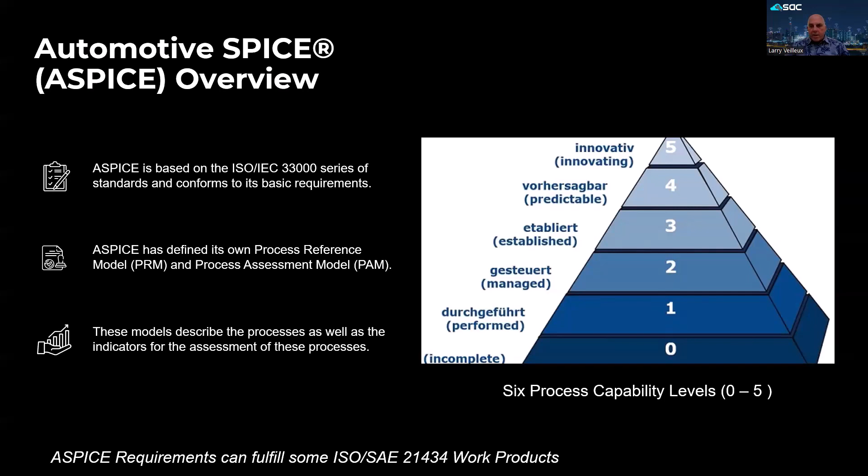ASPICE is based on ISO IEC 33000, a family of international standards developed by ISO that revises the ISO IEC 15504 series of international standards. It provides a framework for the assessment of process quality characteristics, process capability, and organizational maturity. The framework for assessment covers processes employed in the development, maintenance, and use of systems across the information technology domain, and those employed in the design, transition, delivery, and improvement of services. Results of an assessment can be used for improving process performance, benchmarking, or for identifying risks associated with the application of the processes.

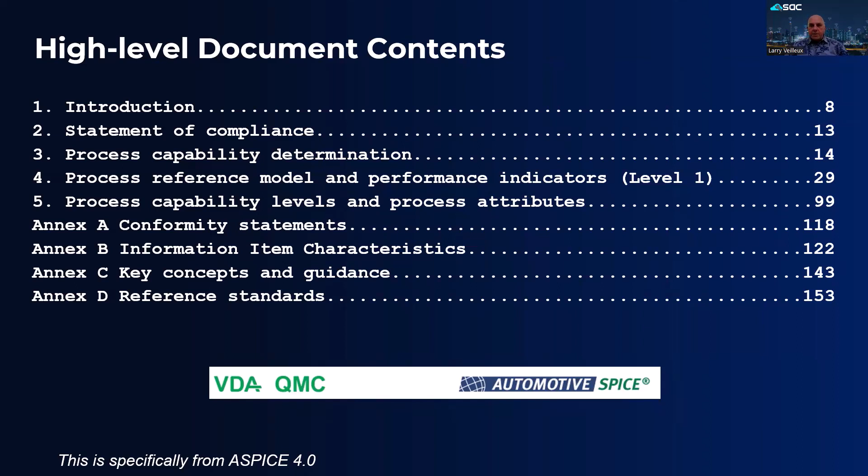I'm not going to go through all the details of all the chapters and annex items now, but here they are represented at a high level. The overall process assessment model, or PAM, the process reference model, or PRM, and measurement framework are covered in Chapter 3, followed by how to achieve each capability level, or CL, for processes for Level 1 in Chapter 4, and process attributes for Levels 1 through 5 in Chapter 5. Yes, soon you'll know the difference between process and process attributes. Finally, I'll cover information item characteristics and key concepts and guidance in Annexes B and C, respectively.

Process assessment is a disciplined evaluation of an organization's processes against a process assessment model. The Automotive SPICE Process Assessment Model, PAM, is intended for use when performing conformant assessments of the process capabilities on the development of embedded automotive systems. It was developed in accordance with the requirements of ISO IEC 33004.

Automotive SPICE has its own process reference model, PRM, which was developed based on the Automotive SPICE Process Reference Model, now 4.0. It was further developed and tailored considering the specific needs of the automotive industry. If processes beyond the scope of Automotive SPICE are needed, appropriate processes from other process reference models, such as ISO IEC 12207 or ISO IEC IEEE 15288, may be added based on the business needs of the organization. The PRM is incorporated in this document and is used in conjunction with the Automotive SPICE process assessment model when performing an assessment. The Automotive SPICE PAM contains a set of indicators to be considered when interpreting the intent of the ASPICE processes. These indicators may also be used when implementing a process improvement program.

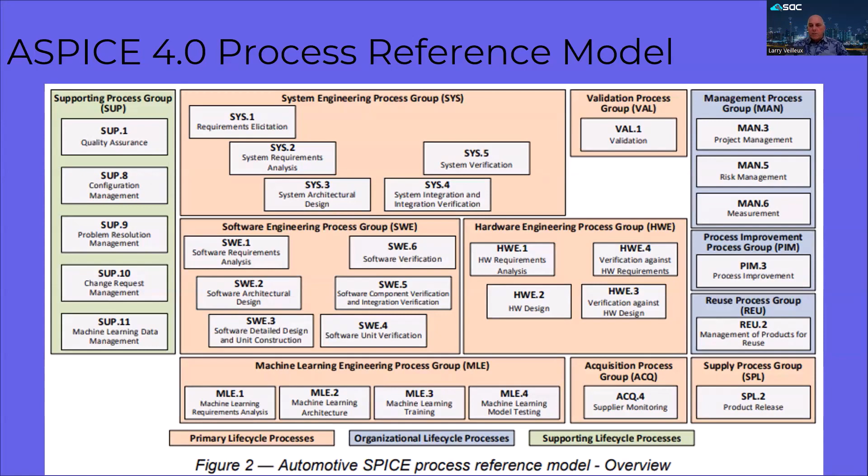ASPICE for Cybersecurity 1.0 was published in July 2021. What other cybersecurity standards and regulations were also published that year? ISO SAE 21434 and UNECE WP29, R155 and R156 come to mind. Do you suppose it's a coincidence?

You will always have the system level engineering processes for SYS.1 through SYS.5 organized in a system V model as mentioned before. Then depending on what you're developing, you can add on the hardware and software domain level processes, and perhaps others such as cybersecurity, as well as to support future processes. All other processes, such as management processes and supporting processes, are system and domain independent and are therefore designed in a way that they can be applied to both the system level and domain levels.

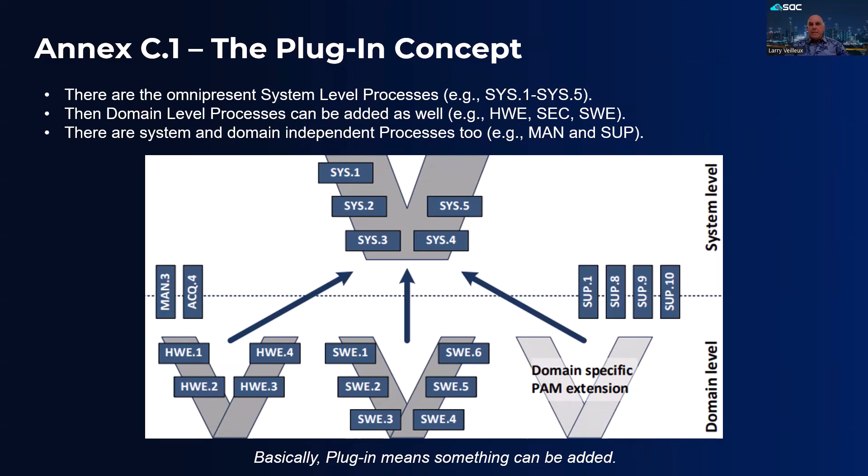First, note that Annex C.2 discusses the concepts of element, component, and unit. An element can be thought of as an item in the context of ISO SAE 21434, but referred to as a system with ASPICE. As such, an element provides the function at the vehicle level. An element consists of components, which can further be broken down into units, where a unit, such as a software library, is a representation of software element at the lowest level in the conceptual model, which is decided not to be further subdivided, and that is part of a software component.

Now, you automotive aficionados will recognize the V model depicted here, where the left side represents the concept and design processes, and the right side represents the integration, verification, and validation processes. You can see it's specifically related to the ASPICE processes, at least for SYS and SWE depicted here.

Speaking of verification and validation, tests with ASPICE 3.1 was replaced by verification with 4.0, and 4.0 also added validation. While verification will help determine if the product was built right, validation will help determine that the right product was built. In other words, it meets its intended use.

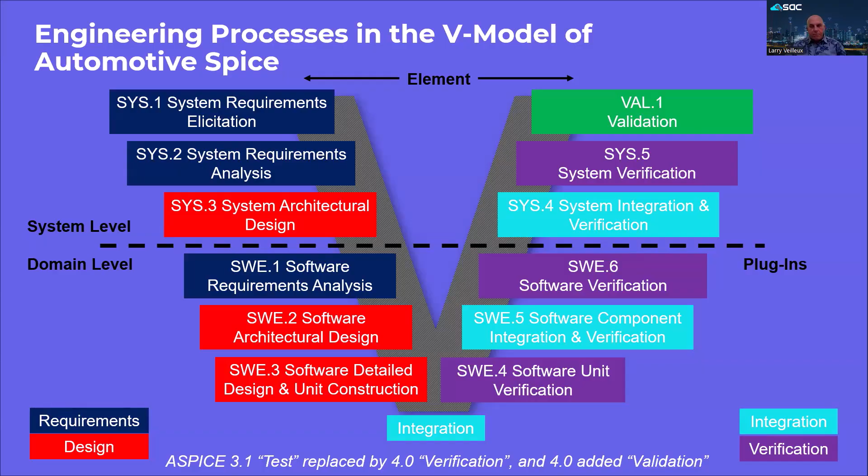As discussed previously, the process groups are organized into 3 process categories: the primary lifecycle processes, organizational lifecycle processes, and supporting lifecycle processes.

The primary lifecycle process category consists of processes that may apply for an acquirer of products from a supplier, or may apply for product development when responding to stakeholder needs and delivering products, including the engineering processes needed for specification, design, implementation, integration, and verification. Following, I'll cover each of the primary process groups in a little more detail.

The primary lifecycle process category consists of the following groups. The acquisition process group, ACQ, consists of processes that are performed by the customer or by a supplier when acting as a customer for its own suppliers in order to acquire a product and or service.

The supply process group, or SPL, consists of one process performed by the supplier in order to supply a product and or service. The System Engineering Process Group, or SYS, consists of processes addressing the elicitation and management of customer and internal requirements, definition of system architecture, and the integration and verification on the system level.

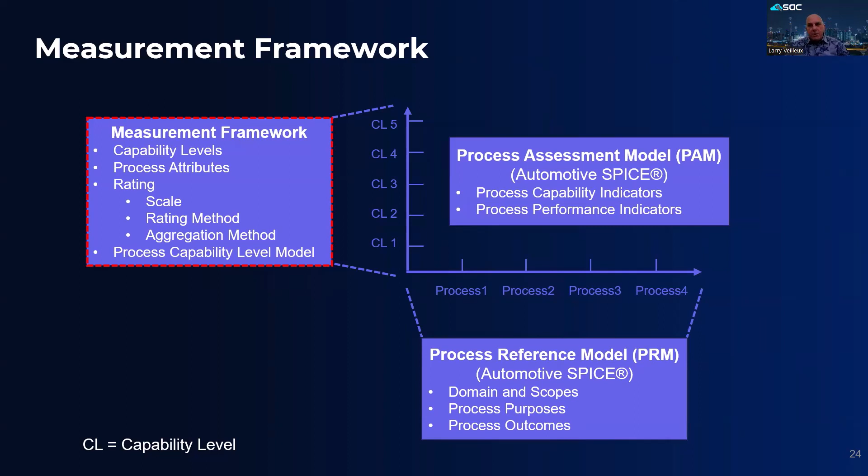As highlighted here, next we're going to explore the measurement framework, which introduced the capability levels. There are 6 process capability levels, process attributes, of which there are 9, and the ratings.

The measurement framework consists of 6 process capability levels, 9 process attributes, process attribute ratings, rating and aggregation methods, and the process capability level model.

The measurement framework provides the necessary requirements and rules for the capability dimension. It defines a scheme which enables the assessor to determine the capability level, or CL, of a given process. To enable the rating, the measurement framework provides process attributes, or PA, defining a measurable property of the process capability. Each PA is assigned a specific CL.

The extent of the achievement of a certain PA is represented by means of a rating based on a defined rating scale. The rules from which an assessor can derive a final capability level for a given process are represented by the process capability level model.

The process capability levels and associated process attributes are described in detail in chapters 4 and 5 of the ASPICE 4.0 document. Process attributes, discussed next, are features of a process that can be evaluated on a scale of achievement, providing a measurement of the capability of the process. Process attributes are applicable to all processes.

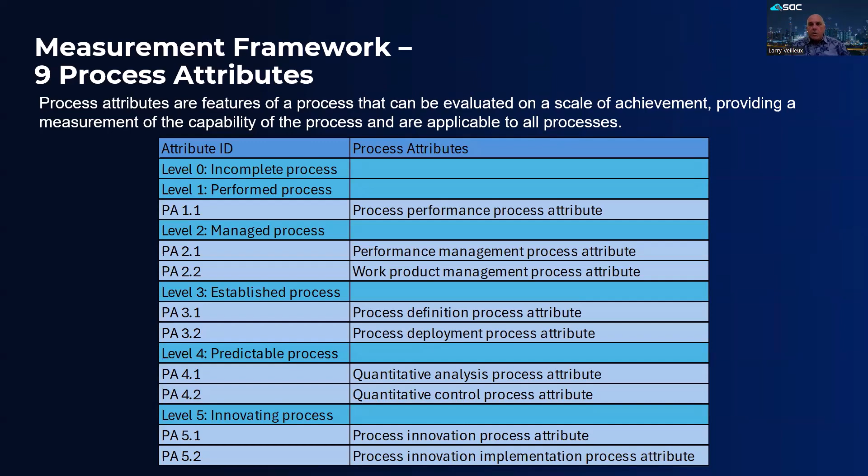Each is determined by the percentage of achievement. N for not achieved, meaning there is little or no evidence of achievement of the defined process attribute in the assessed process. P is for partially achieved, meaning there is some evidence of an approach to and some achievement of the defined process attribute in the assessed process. However, some aspects of achievement in the process attribute may be unpredictable.

L is for largely achieved, meaning there is evidence of a systematic approach to and significant achievement of the defined process attribute in the assessed process. However, some weakness related to this process attribute may exist in the assessed process.

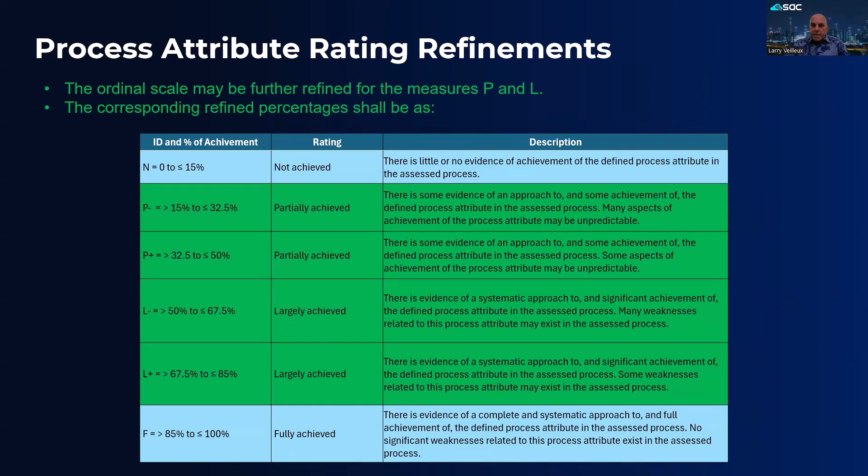As depicted here, the ordinal scale just discussed may be further refined for the measures of partially achieved and largely achieved. They are referenced as P plus and minus and L plus and minus respectively. Here, the corresponding refined percentages are displayed in green. Note that the percentages for not and fully achieved, as well as all descriptions, remain the same.

Rating and aggregation methods are taken from ISO IEC 33020 and are used to determine whether process and process attributes achieve the process purpose and scope, as well as how the results are or are not aggregated for the rating. Rating method 1, or R1, requires full rating and aggregation across both dimensions, horizontal and vertical. Rating method 2, or R2, as well as R3, only rate the process attribute level, whereas R2 requires aggregation and R3 does not. Now, honestly, this is a bit more complicated than I can summarize here.

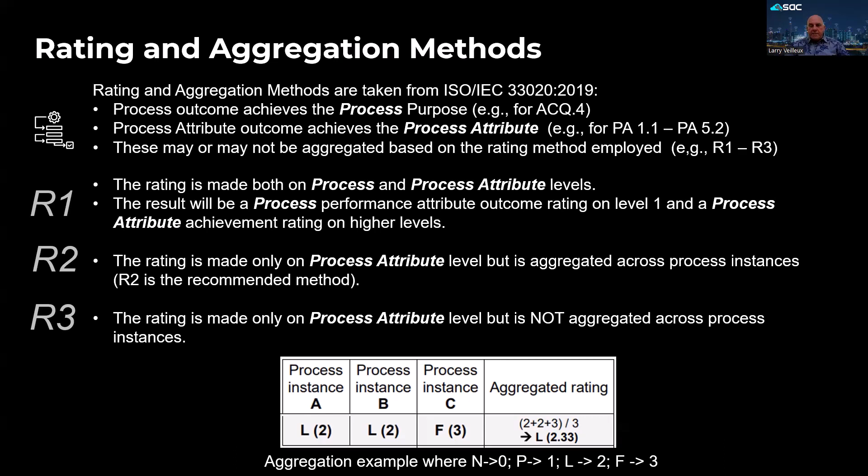But now that you have the basic concept, I suggest you refer to the VDA ASPICE Guidelines section 1.4.4.

The process capability level achieved by a process shall be derived from the process attribute ratings for that process according to the process capability level model depicted on the left side of the slide here, and covered in more detail next. The process capability level model defines the rules for how the achievement of each level depends on the rating of the process attributes for the assessed and all lower levels.

As a general rule, the achievement of a given level requires a largely or fully achievement of the corresponding process attributes and a full achievement of any lower lying process attributes. Notice how each level includes not only its specific process attributes, but also those of the lower levels, such as level 2 includes both PA 1.1 as fully achieved and PA 2.1 and 2.2 as largely or fully achieved.

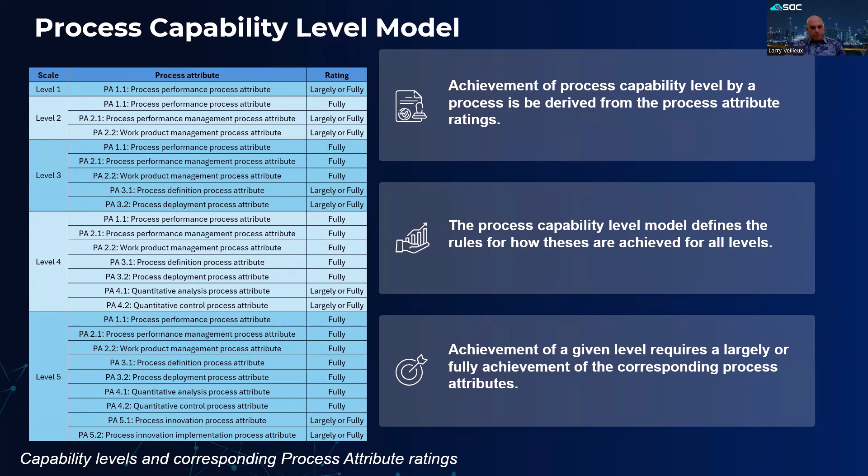As highlighted here, next we're going to explore the overall process assessment model. The process assessment model, or PAM, is a combination of the measurement framework and the process reference model. This entails applying the rating scale to each of the process attributes for all processes.

PAM offers assessment indicators in order to identify whether the process outcomes and the process attribute outcomes, or actual achievements, are present or absent in the instantiated processes of projects and organizational units. Assessment indicators are base or generic practices, BP and GP respectively, in combination with information item characteristics, or IIC. More on these following. These indicators provide guidance for assessors in accumulating the necessary objective evidence to support judgments of capability. However, they are not intended to be required as a mandatory set of checklists to be followed.

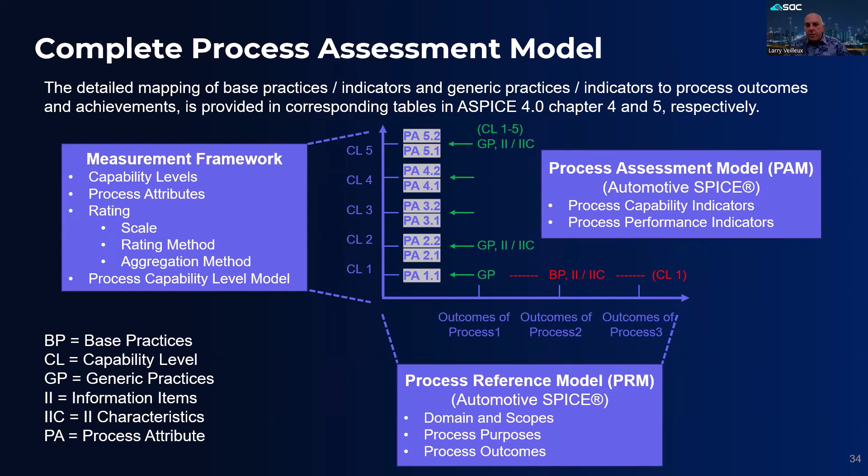As you can see here, I've added the process attributes (PA), base practices (BP), generic practices (GP), and information items (II) and II characteristics (IIC), referred to as assessment indicators. I have also added outcomes of each process. Note that a specific process attribute, 1.1 for level 1, just requires the process achieves its defined outcomes for base practices and a single generic practice, both with their associated information item characteristics. Therefore, the only process performance attribute for capability level 1 is PA 1.1 and a single generic practice, or GP 1.1.1, pointing as an editorial reference to the respective process performance indicators.

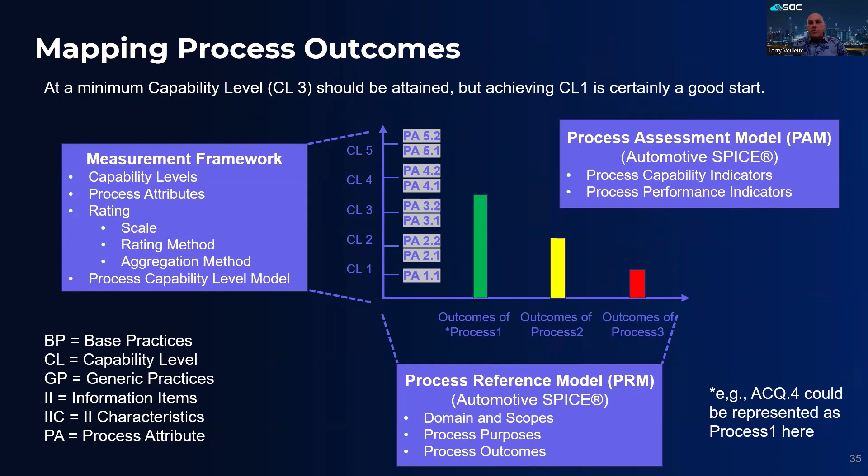As mentioned before, each process can be represented on a single XY graph according to how it's achieved a specific capability level (CL), according to its level 1 base practices and levels 1 through 5 generic practices for process attributes. Here you can see process 1 has achieved capability level 3, whereas process 2 has achieved capability level 2, and process 3 has not even achieved capability level 1.

According to ISO/IEC 33004, a process assessment model needs to define a set of assessment indicators that explicitly addresses the purpose and process outcomes of the processes within the scope of the process assessment model. It demonstrates the achievement of the process attributes within the scope of the process assessment model, and demonstrates the achievement of the process quality levels within the scope of the process assessment model.

The assessment indicators generally fall into 3 types: practices that support achievement of either the process purpose or specific process attribute, information items and their characteristics that demonstrate the respective achievements, and resources and infrastructure that support the respective achievements. In the assessment model, only practices and information items are used. Practices represent activity-oriented indicators, while information items represent result-oriented indicators. Both practices and information items are used for judging objective evidence to be collected and accumulated in the performance of an assessment.

Practices support achievement of either the process purpose for base practice or the specific process attribute for generic practice. Base practices (BP) apply to capability level 1 and provide an indication of the extent of the achievement of process outcomes. Base practices relate to one or more process outcomes, thus being always process-specific and not generic. Generic practices (GP) apply to capability levels 1 to 5 and provide an indication of the extent of process attribute achievements. Generic practices relate to one or more process attribute achievements, thus applying to any process. Hence, they're generic.

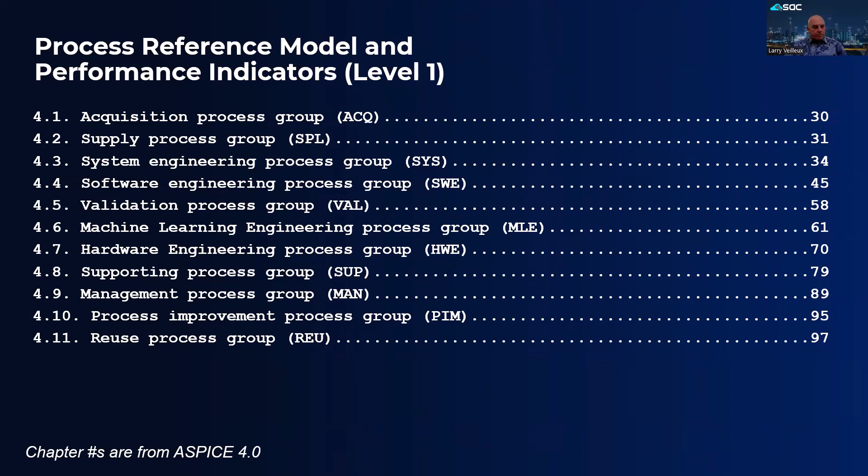The process reference model and performance indicators for level 1 are discussed in ASPICE 4.0 Chapter 4 and ASPICE for Cybersecurity Engineering Chapter 2. Here I'm only going to cover one process for ACQ.4, supplier monitoring, so you understand a general structure that ASPICE uses for each of the processes.

Note that base practices, or BPs, as mentioned previously, are only relative to level 1, indicating there is at least a performed process in place. You can say that it's a minimum requirement for complying with ASPICE, whereas achieving higher capability levels require additional process attributes to be achieved. I'll discuss more on that in a subsequent section.

Each process consists of a defined ID, name, purpose, outcomes, various BPs, and output information items, i.e. work products. BPs are indicators for the achievement of the process outcomes and may be regarded as requirements. I will cover each of these on the following slides.

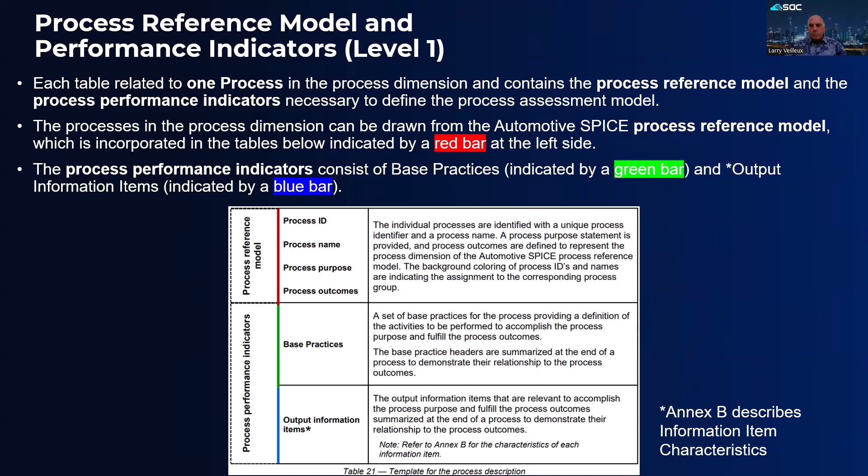The process for supplier monitoring is assigned process ID ACQ.4. It has a simple process purpose to track and assess the performance of an external contract-based supplier company against agreed commitments. As such, it can be mapped to ISO SAE 21434 work product WP0701 for establishing a cybersecurity interface agreement, or CIA, related to base practice 1 covered next.

ACQ4 process outcomes consist of the following. Number 1, joint activities as agreed between the customer and supplier are performed. 2, all information agreed upon for exchange is communicated regularly between the customer and the supplier. 3, performance of the supplier is monitored against the agreements. And 4, changes to the agreement, if needed, are negotiated between the customer and the supplier and documented in the agreement.

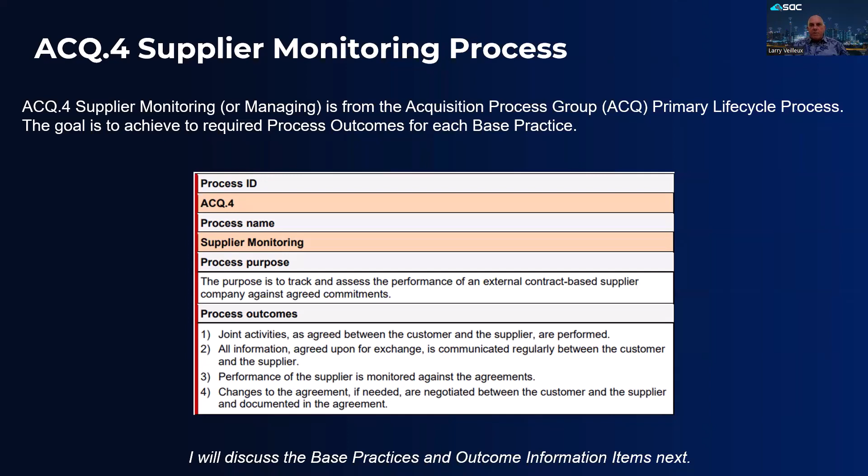As mentioned previously, base practices, or BP, apply at capability level 1 and provide an indication of the extent of achievements of the process outcomes. ACQ4 consists of 5 base practices, BP1 through BP5. Of course, other processes have their own and obviously different base practices. Most have more, but some have less. For instance, SYS1 has 4, while SPL.2 has 8.

I'm not going to repeat all those here, but next you'll see how the BPs and the information items are mapped to each of the outcomes, 1 through 4 for ACQ4. Base practices and output information items are mapped to their desired outcome to achieve. All must achieve the desired outcome to be considered as complying with capability level 1. The document lists a spreadsheet-like table that shows which IIs and which BPs must meet the required outcomes.

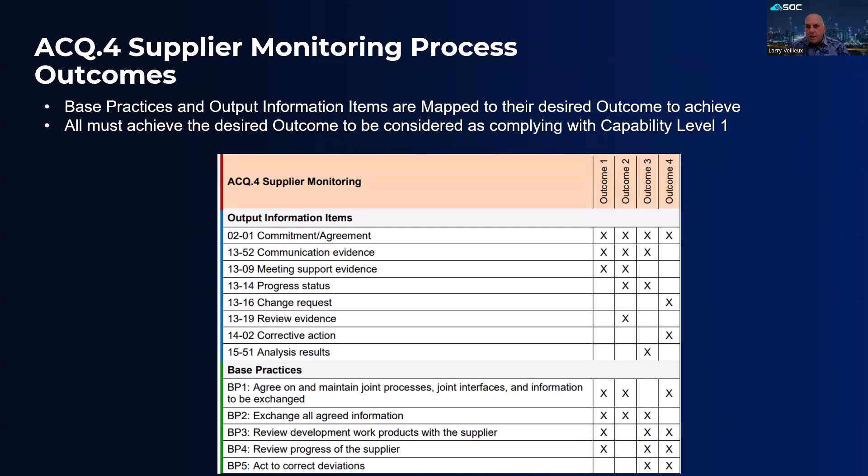Speaking of information items, or IIs, more on that next. An information item, or II, is a separately identified body of information that is produced, stored, and delivered for human use. Human use includes the information stored, managed, and processed by a tool. Characteristics of IIs are defined using the scheme in Table B1 and Annex B, but I have only represented 02-01 and 03-50 here. Each entry consists of an information item identifier, IID, information item name, and information item characteristics, or IIC.

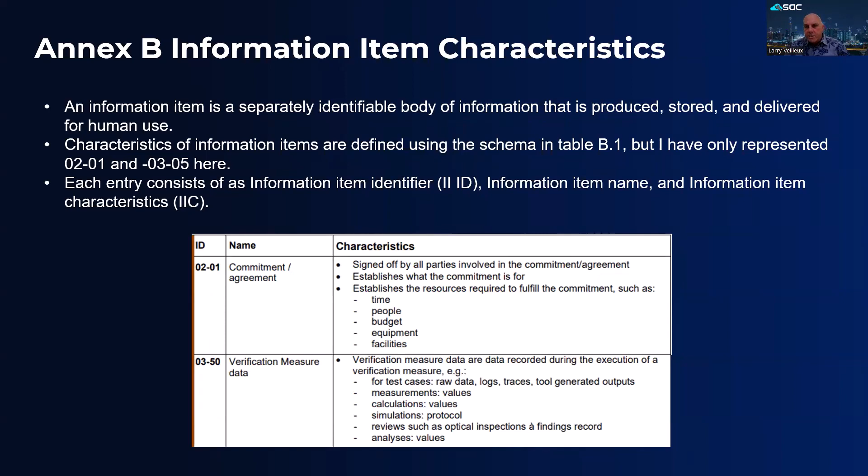Now that you understand how to achieve capability level 1 using process performance indicators, let's discuss how to achieve capability levels greater than 1 using process capability indicators for process attributes.

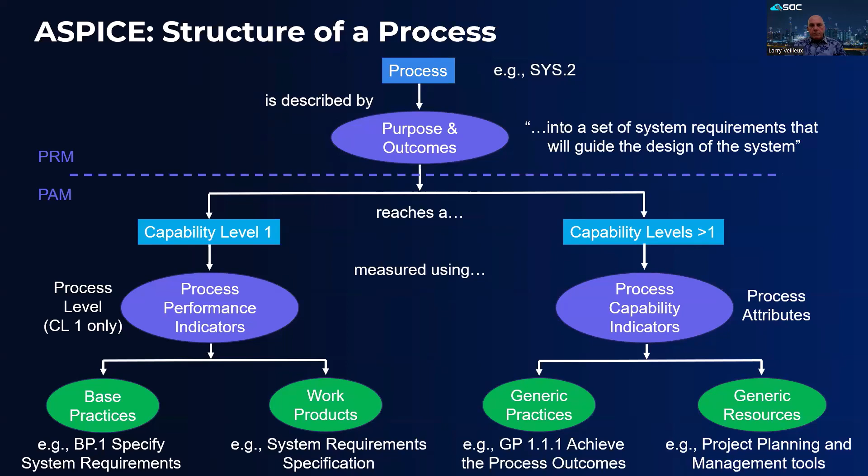I will now cover the process capability levels and process attributes for levels 1 through 5. Process attributes, or PAs, defines the generic practices, or GPs, and information items and their mapping to the process attributes for each capability level defined in the measurement framework.

Similar to covering only the ACQ4 process previously, I'm only going to cover one process attribute for PA 2.1, Process Performance Management process attribute, so that you understand the general structure that ASPICE uses for each and every process attribute. Each process attribute consists of a defined ID, name, scope, achievement, various GPs and output information items, i.e. work products. GPs are indicators for the attainment of the process outcomes and may be regarded as requirements. I will cover each of these on following slides.

But first, it is interesting to note some of the differences between the performance indicators for level 1, as previously discussed, and the process attributes for levels 1 through 5. Whereas the former provided a purpose, the latter provides a scope. Also, the former provided an outcome, and the latter provides an achievement. A minor detail, I suppose, but it is what it is.

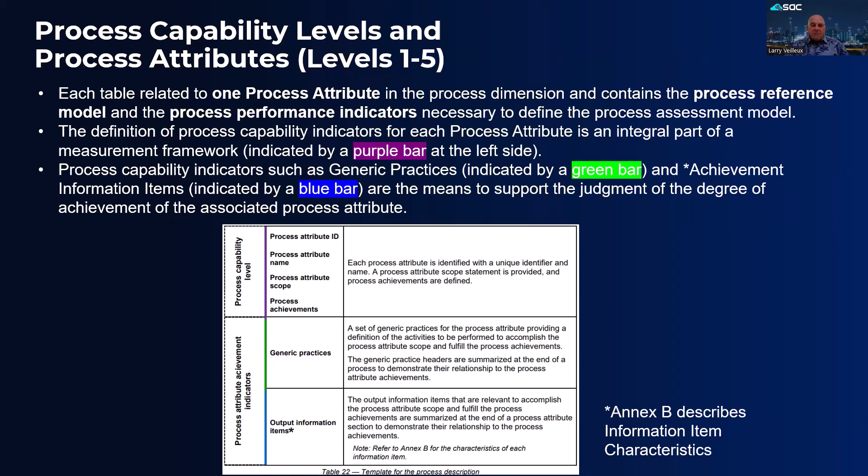First, note that there is no PA0 process attribute for process capability level 0. That's because the process is not implemented and/or it fails to achieve its process purpose, meaning at this level there is little or no evidence of any systematic achievement of the process purpose. Finally, due to lack of a defined process attribute for process capability level 0, no generic practices and information items are defined.

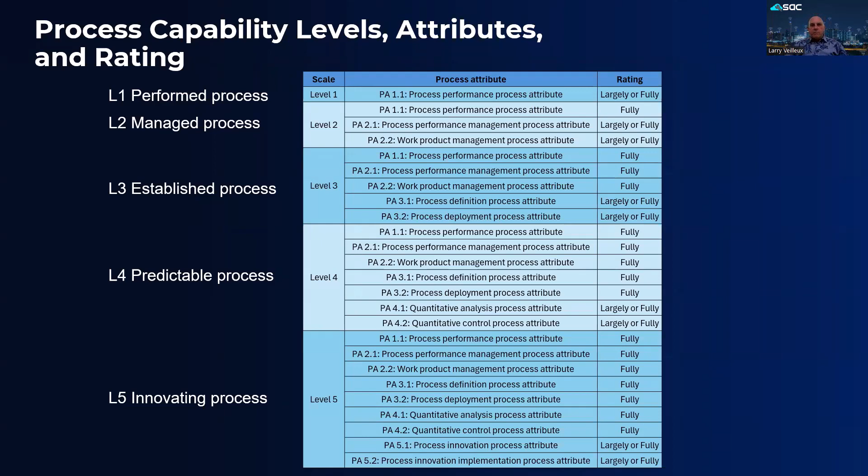The process performance management process attribute is assigned process attribute ID PA 2.1. It has a simple process attribute scope, such as the performance management process attribute is a measure of the extent to which the performance of the process is managed.

PA 2.1 process attribute achievements consist of the following: 1, strategy for the performance of a process is defined based on identified objectives. 2, performance of the process is planned. 3, performance of the process is monitored and adjusted to meet the planning. 4, human resources, including responsibilities and authorities for performing the process, are determined. 5, physical and material resources are determined. 6, persons performing the process are prepared for executing their responsibilities. 7, physical and material resources for performing the process are identified, made available, allocated and used. And 8, interfaces between the involved parties are managed to ensure both effective communication and the assignment of responsibilities.

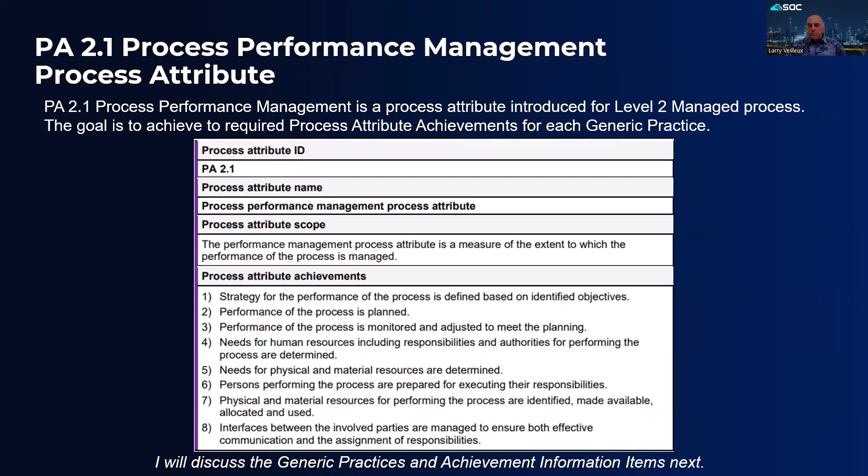As mentioned previously, generic practices apply to capability levels 1 through 5 and provide an indication of the extent of process attribute achievements. PA 2.1 consists of 6 generic practices, GP 2.1.1 through GP 2.1.6. Of course, other process attributes have their own, and obviously different, generic practices. And it's notable that generic practices are not specific to a process - that's why they're considered generic. Rather, they're specific to a level for all processes.

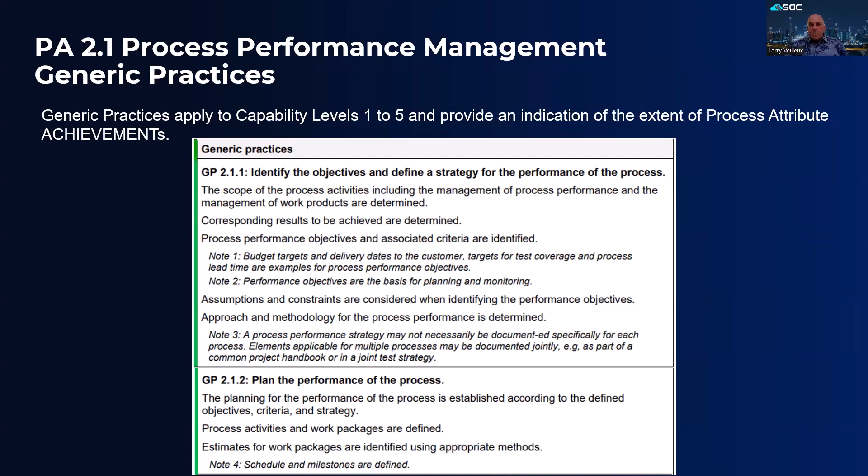I'm not going to repeat all here, but next you will see how the GPs and IIs are mapped to each of the achievements, 1 through 8, for PA 2.1. First, here are the remaining GPs 2.1.3 through 2.1.6 for PA 2.1. I'll list them here just for completeness, and I'm not going to repeat them all here.

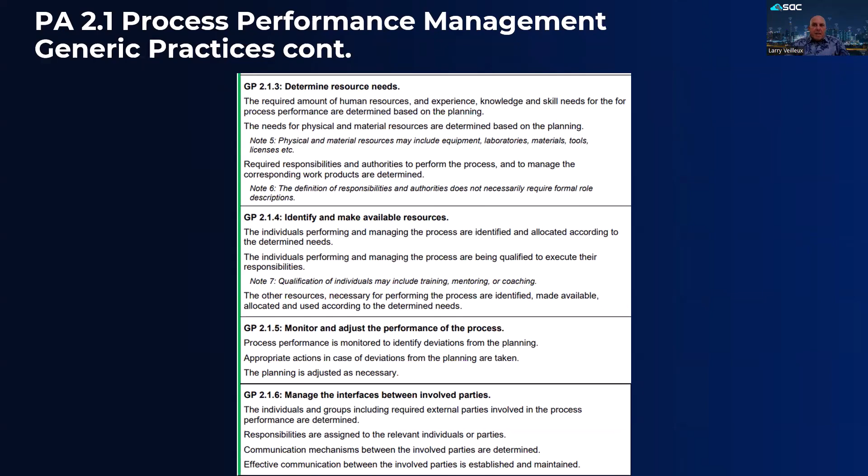Generic practices and output information items are mapped to their desired achievement. All must support the desired achievement to be considered as complying with its associated capability level 1 through 5. In the example CL2, which also includes PA 1.1 and PA 2.2, as mentioned with base practices, the document lists a spreadsheet-like table that shows which IIs and which GPs must meet the required achievements. Note that BP outcomes versus GP achievements - they're like potatoes versus potatoes, so to speak.

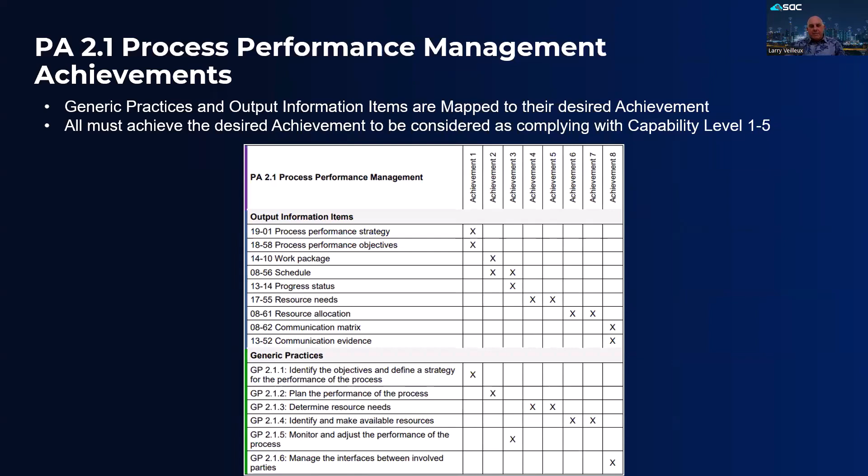The last topic I'll cover is traceability and consistency as represented in ASPICE 4.0, Annex C5. I say represented since the document does not do too much to describe it. However, the VDA Automotive SPICE guidelines I mentioned previously does, in section 2.1.6, base practices on consistency and traceability.

So why should you put effort into traceability and consistency? Well, ASPICE also requires that you ensure traceability and consistency between your system requirements and stakeholder requirements. Traceability can be established through hyperlinks such as DOORS, through specific traceability tools such as Reqtify, through traceability matrices, or through other manageable means which are supported by your company's tool landscape.

The purpose of traceability is to, one, support consistency checks, like for instance to verify the completeness and accuracy of system requirements. Two, to support the impact assessment in case of change requests or deficiencies. And three, to support the reporting of stakeholder expectations.

The second part of this aspect is consistency. Consistency means you have to ensure completeness and correctness of your system requirements against the stakeholder requirements. As this process is your entry into your development, you want to ensure that your stakeholder requirements are covered in system requirements correctly. Finally, in Automotive SPICE, consistency must be fulfilled as required by the traceability consistency base practices in MAN 3 or the SYS, SWE, or HWE processes.